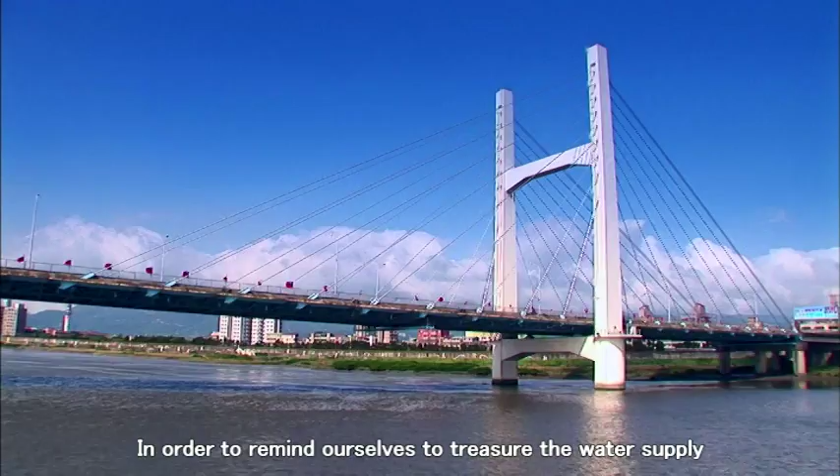Although Earth is mostly covered with water, the fresh water is less than 0.5%. The scarcity of water is resulted from the heavy environmental pollution and climate change. In order to remind ourselves to treasure the water supply, the United Nations has set the date of the 22nd of March to be World Water Day.

Although Taiwan is surrounded by oceans, the obtainable water for the people of Taiwan is only 1/6 of the average of the world and is ranked to be the 18th water shortage country globally.

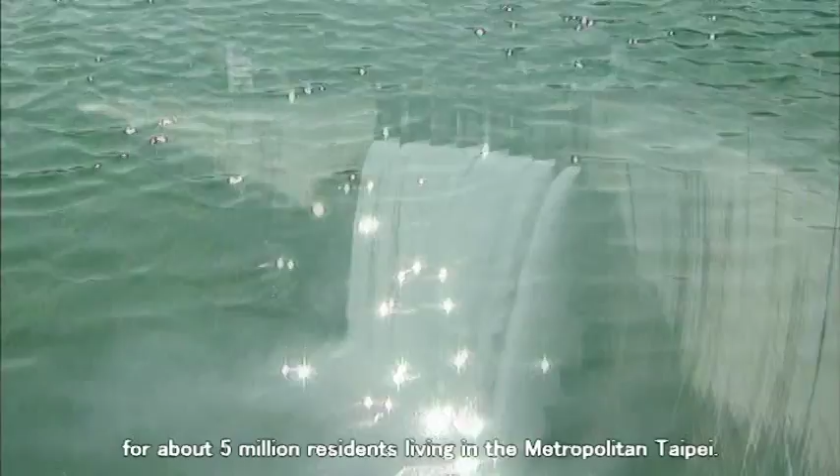The Taipei Feitsui Reservoir provides domestic water use for about 5 million residents living in metropolitan Taipei. Besides the domestic use of water, the reservoir also provides water for industrial use and firefighting to protect public safety and properties, and provides a strong support for economic development.

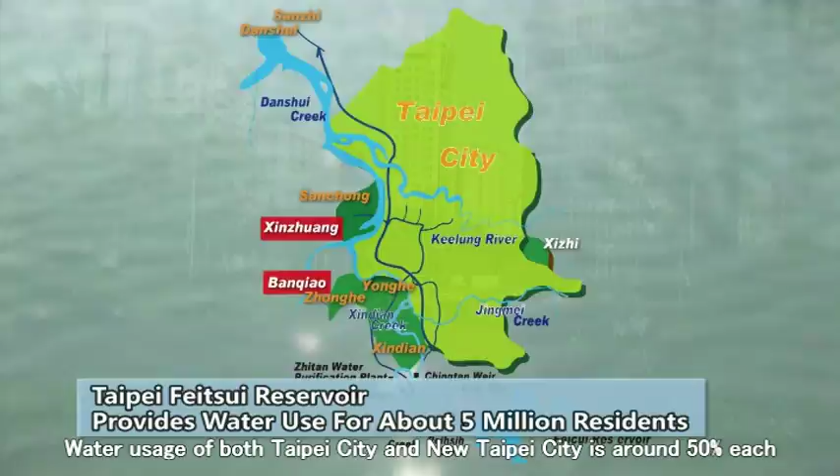Taipei Feitsui Reservoir Project provides water supply for the Taipei region, including Taipei City, as well as Xindian, Zhonghe, Yonghe, Sanchong, Danshui, and Sanzhi of New Taipei City. In recent years, Taipei Feitsui Reservoir also provides water supply for Banqiao, Xinzhuang, as well as others. Water usage of both Taipei City and New Taipei City is around 50% each, achieving the ideal goal of sharing the water of Feitsui Reservoir between two cities.

Rivers in Taiwan are short and oftentimes flow rapidly into oceans. It is difficult to have a stable water supply without reservoirs. As a consequence of increasing population and industry development in Taipei in the 1970s, water supply became insufficient, making a large reservoir necessary for metropolitan Taipei at that time.

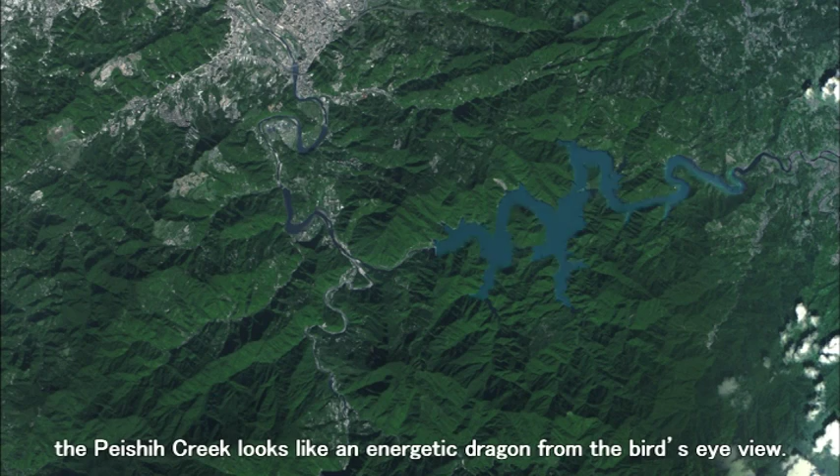Sourced from Mount Xueshan, Peishih Creek looks like an energetic dragon from the bird's eye view. The Feitsui Valley, located downstream of Peishih Creek, shows a rather gentle slope, and its bedrock is really hard and dense. After careful investigation, it is regarded as the optimum site for an arch dam. Accordingly, the reservoir was named as Taipei Feitsui Reservoir.

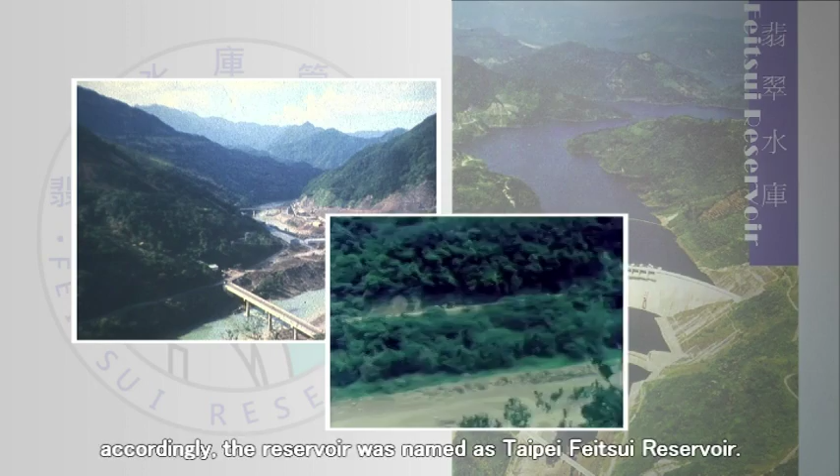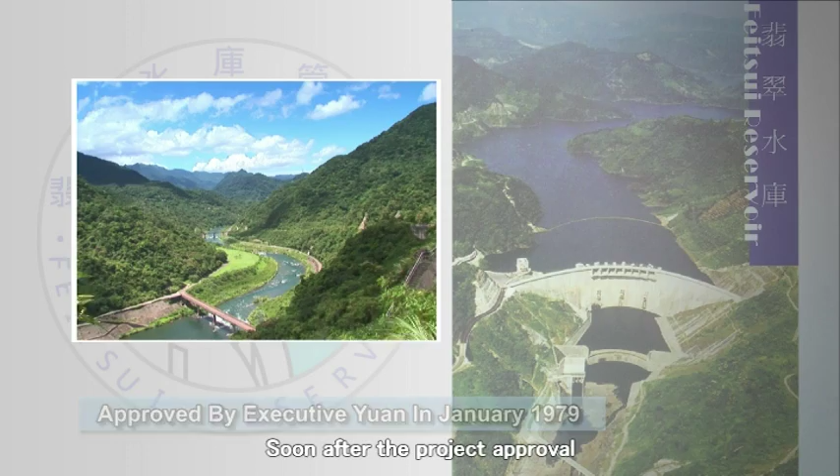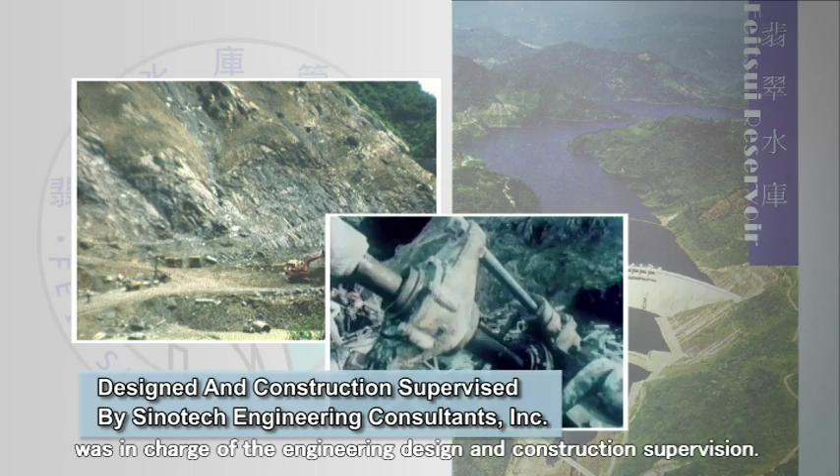Taipei Feitsui Reservoir Project was approved by the Executive Yuan in 1979. Soon after the project approval, Taipei Feitsui Reservoir Committee was set up to oversee the project. Taiwan Power Company was assigned to manage the project, and Sinotech Engineering Consultants Incorporated was in charge of the engineering design and construction supervision. The main contractor was Retired Servicemen Engineering Agency.

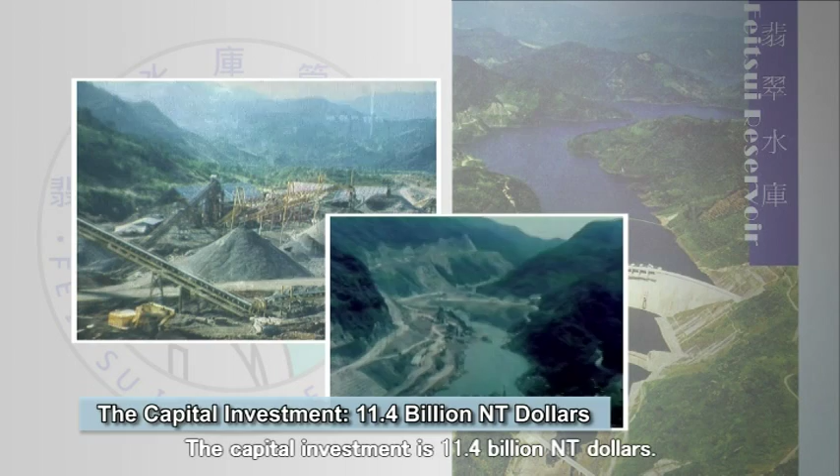The capital investment is 11.4 billion NT dollars. It is the first large arch dam planned, designed, and constructed by locals. The group of the project had behaved efficiently and cautiously. They worked very hard to ensure the project is always on schedule. The contractor made strenuous efforts to meet the target date for completion within 8 years.

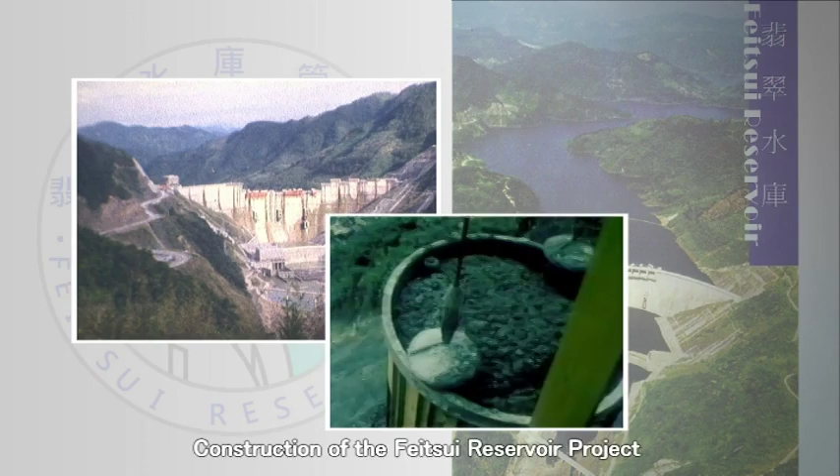Construction of the Feitsui Reservoir project was completed on schedule in June 1987. Then the newly set up Taipei Feitsui Reservoir Administration took over the responsibilities for management.

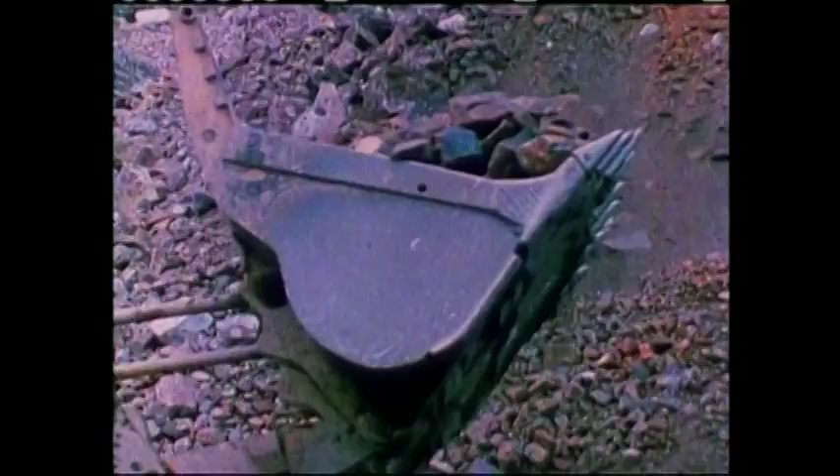Upstream cofferdam and diversion tunnel were completed first during the initial stage of construction. They diverted the water from the creek into the diversion tunnel and dried the riverbed of the dam site. Thus, engineers could excavate the bedrock in the creek to construct the foundation of the dam.

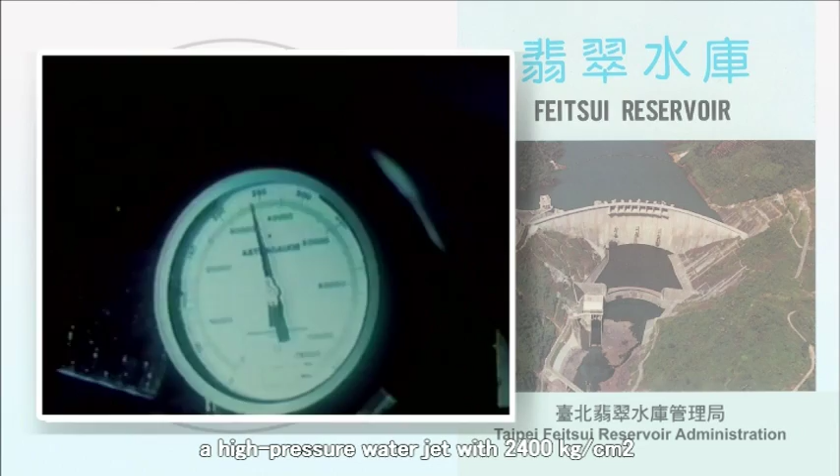During the construction of the dam, due to existence of some clay-filled seams in the bedrock, a high-pressure water jet with 2,400 kilograms per square centimeter was used to clean seams and refill them with non-shrinking cement mortar to enforce the solidity of dam foundation and ensure the dam safety.

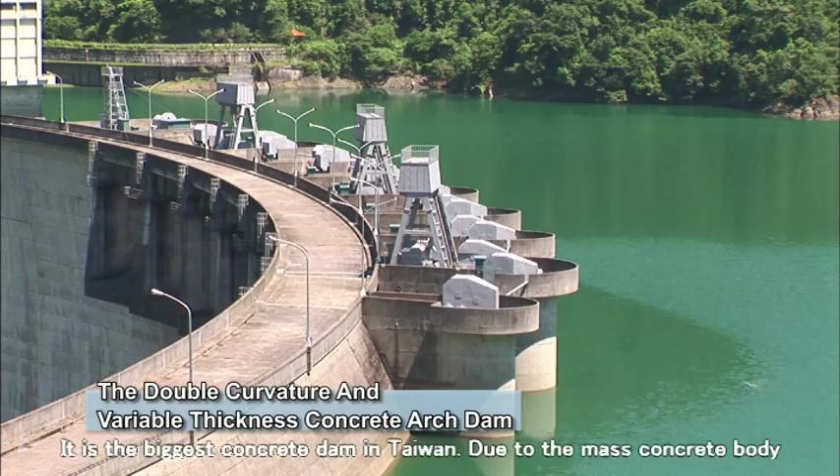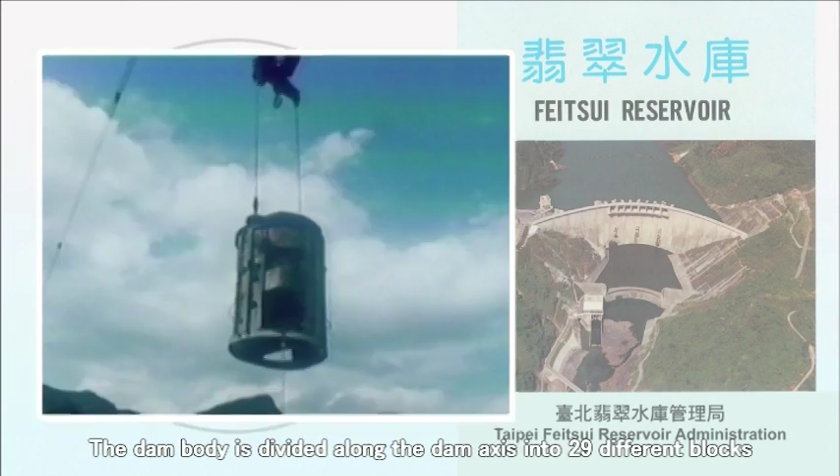The Feitsui Dam is a three-centered double curvature with variable thickness arch dam, the biggest concrete dam in Taiwan. Due to the mass concrete body, temperature control is important when concreting the dam. Pre-cooling and pipe cooling methods were applied. The dam body is divided along the dam axis into 29 different blocks with a total of 938 lifts. Each of the lifts is 2.5 meters high.

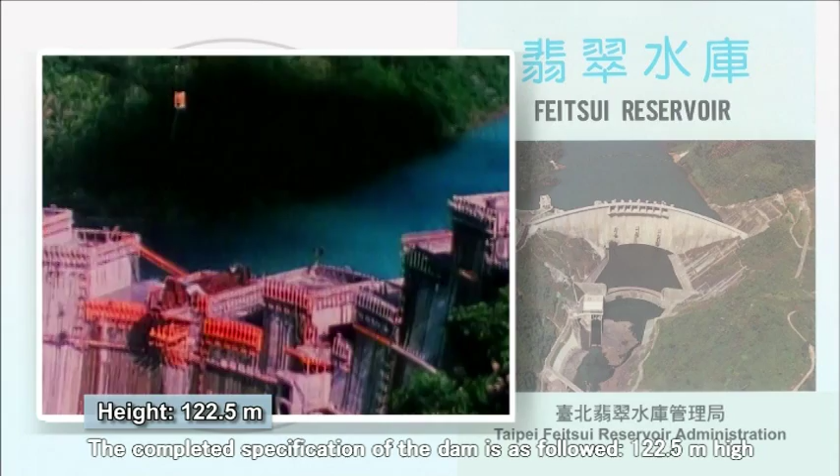The main function of the dam is to intercept and store water flowing from Beishi Creek. The completed specification of the dam is as follows: 122.5 meters high, about 45 stories tall, and 510 meters long at the crest, with 700,000 cubic meters of concrete in volume.

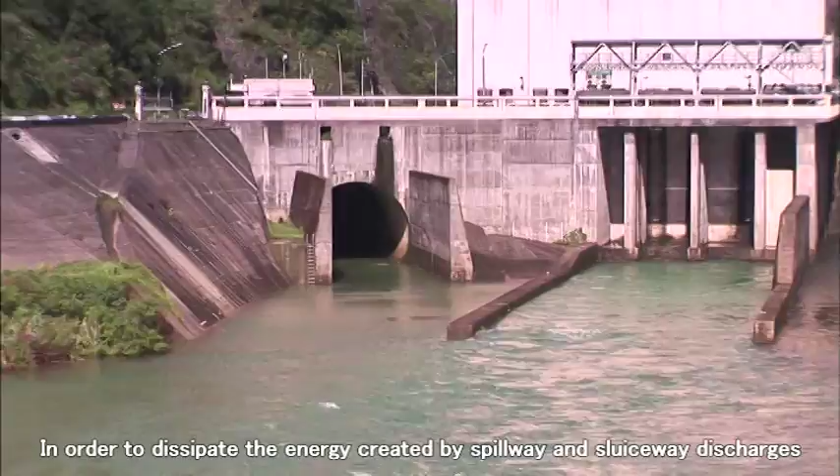The spilling facilities consist of 8 crest spillways, 3 sluiceways, and 1 tunnel spillway. The design flood discharge is 9,870 cubic meters per second. In order to dissipate the energy created by spillway and sluiceway discharges, a plunge pool of depth 33 meters is provided immediately downstream of the main dam.

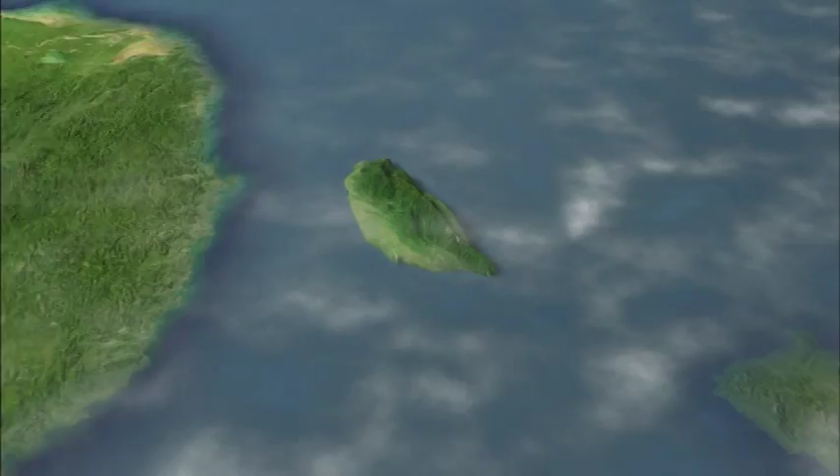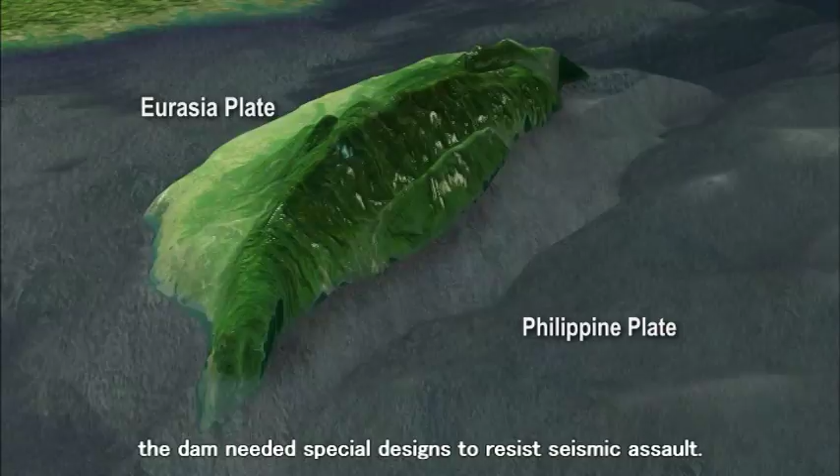Since Taiwan is located within the collision zone of the Eurasian Plate and the Philippine Sea Plate, the seismicity along the Taiwan area is very high. Therefore, the dam needed special designs to resist seismic assault. The seismic design of the Feitsui Dam is the same as a nuclear power plant. The design horizontal peak ground acceleration is 0.4 g.

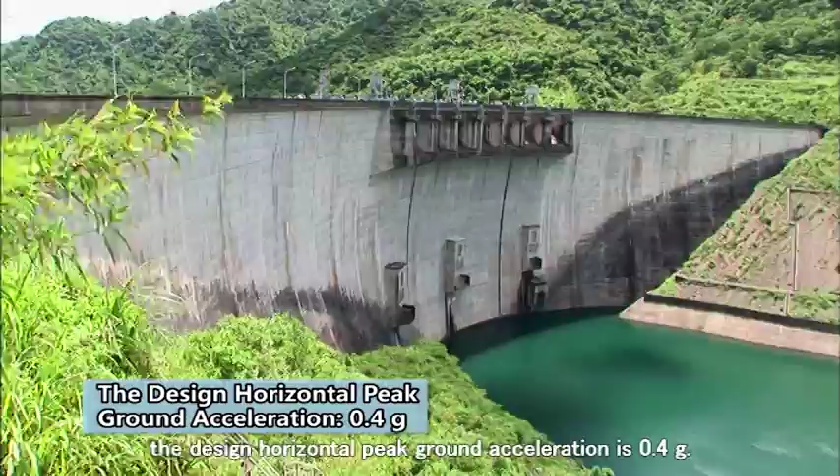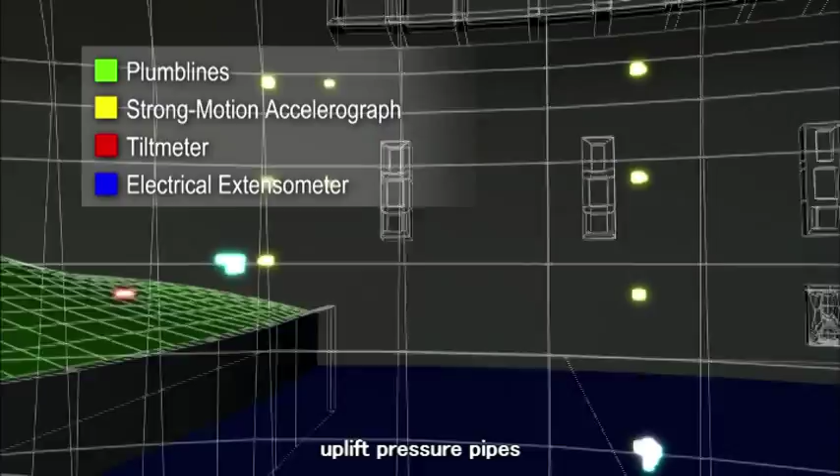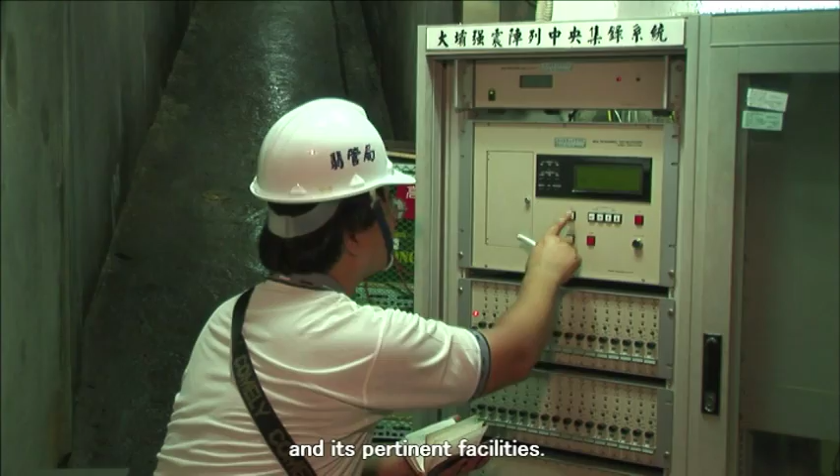The dam and its pertinent facilities are equipped with 17 kinds of instruments, including plumb lines, strain meters, stress meters, uplift pressure pipes, weir stations, strong motion accelerographs, and so on. These instruments monitor the structural behavior of the dam and its pertinent facilities. They also may help detect and analyze potential problems that might occur. For data analysis, a real-time dam safety evaluation system is developed to check the dam behavior.

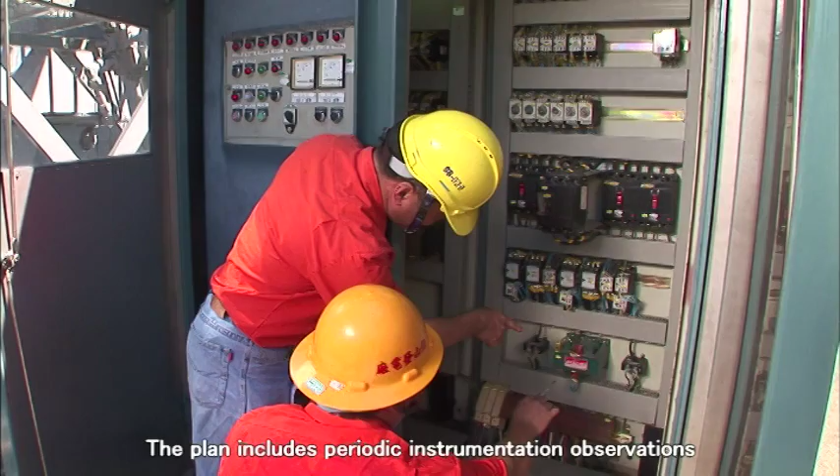In order to ensure the dam safety, we have developed a systematic maintenance plan. The plan includes periodic instrumentation observations, on-site inspections, timely evaluations, maintenance, and special tasks for earthquakes and typhoons.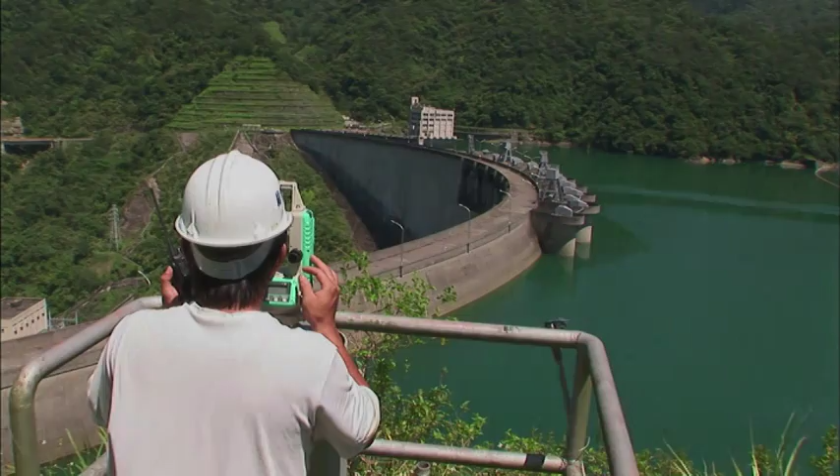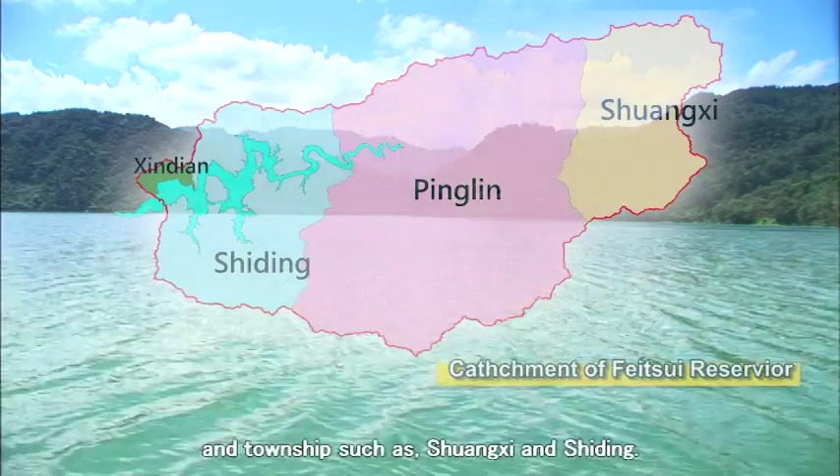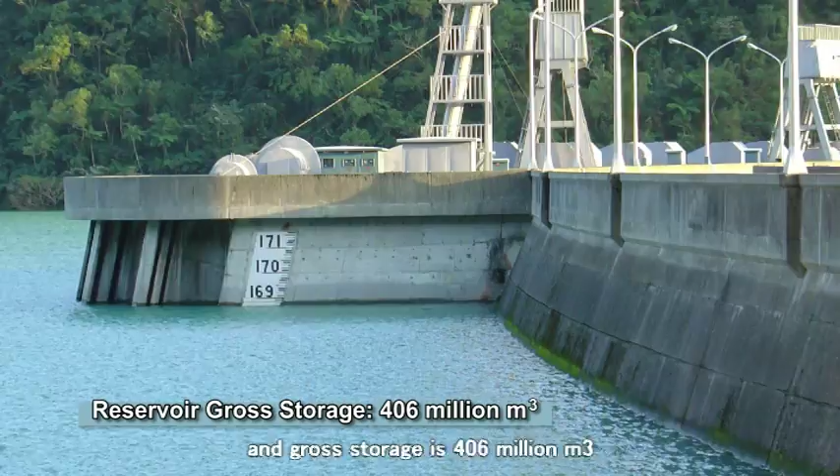The watershed area is about 303 square kilometers. It covers part of New Taipei City, including Pinglin and Xindian, and townships such as Shuangxi and Shiding. The full pool area is about 10.24 square kilometers, and the gross storage capacity is 406 million cubic meters. The full pool level is 170 meters above sea level.

Taipei Feitsui Reservoir is the second largest reservoir next to Zengwen Reservoir in Taiwan. The goal of the Taipei Feitsui Reservoir project is to provide public water use only. The raw water operation policy is utilizing Nanshi Creek natural flow first. If it does not meet the demand, then water is released from the reservoir to satisfy the demand.

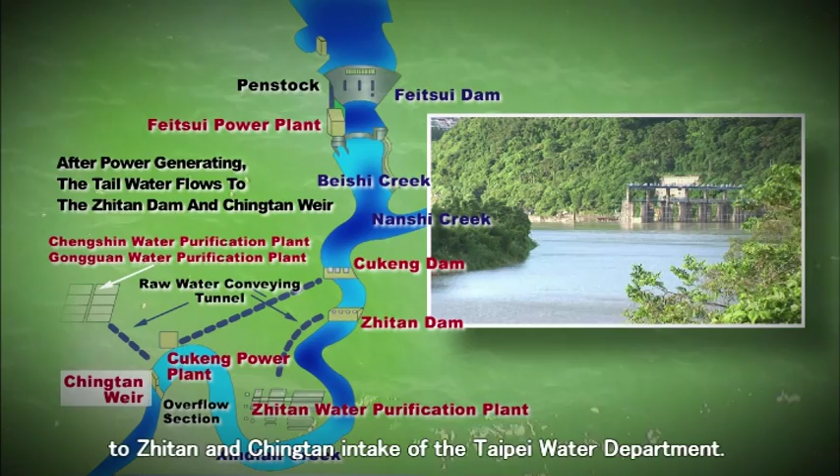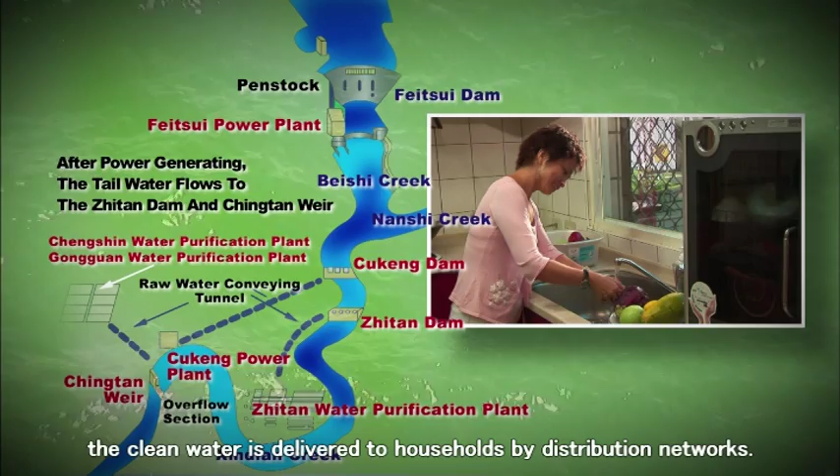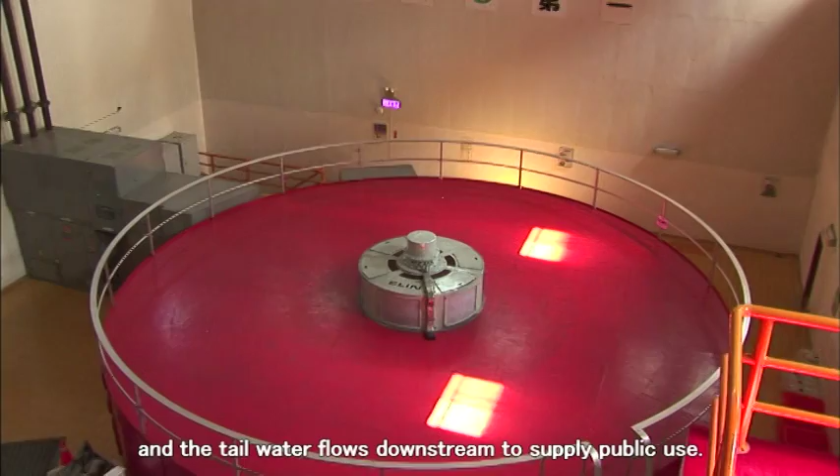Both discharges from the reservoir and Nanshi Creek are conveyed through the river channel to the Zhitan and Chingtan intakes of the Taipei Water Department. After purification at the water treatment plant, the clean water is delivered to households by distribution networks. For efficient water resources utilization, a 70,000 kilowatt hydraulic power plant was installed to generate green electric power, and the tailwater flows downstream to supply public use.

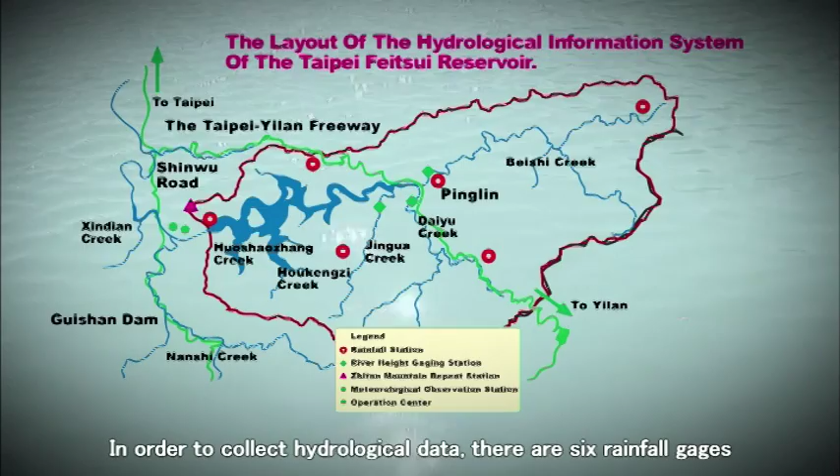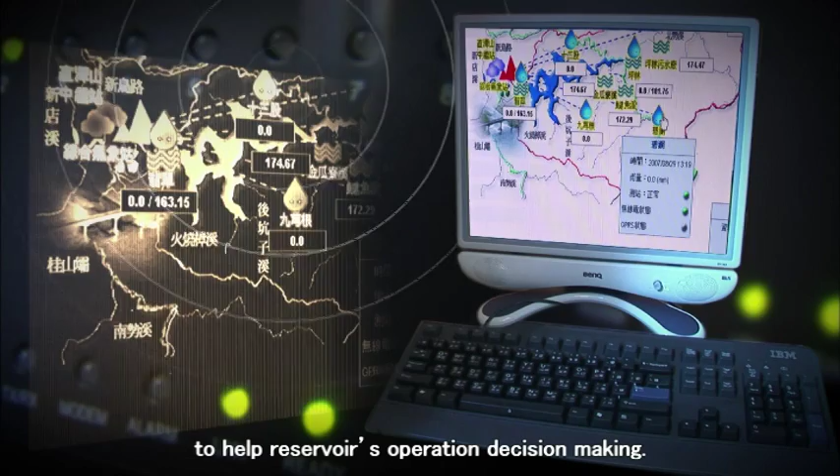In order to collect hydrological data, there are 6 rainfall gauges, 3 discharge stations, and 1 meteorology observation station deployed in the watershed. The real-time data, transmitted wirelessly to the Reservoir Operations Center, are analyzed by a computerized operation system to help reservoir operation decision-making.

When a typhoon attacks, the administration cooperates with the Central Weather Bureau, the Danshui River Basin Flood Control Command Center, and so on. Taipei Feitsui Reservoir Administration also works with the Shihmen Reservoir to release floods strictly following operation rules to ensure dam safety, water supply, and flood mitigation.

The administration releases flood warnings to the media and informs the Disaster Prevention and Rescue Centers of both Taipei City and New Taipei City before flood releasing. The Bureau also uses a flood warning system to notify citizens to prepare themselves for the flood.

To secure the safety of water use for 5 million residents in metropolitan Taipei, the reservoir has been set as a restricted area. Any recreational activity, such as fishing or boating, is not allowed in this area. In order to watch the condition of land use, we inspect the catchment area frequently so that irregularities discovered may be immediately reported to the authorities for corrective action without delay.

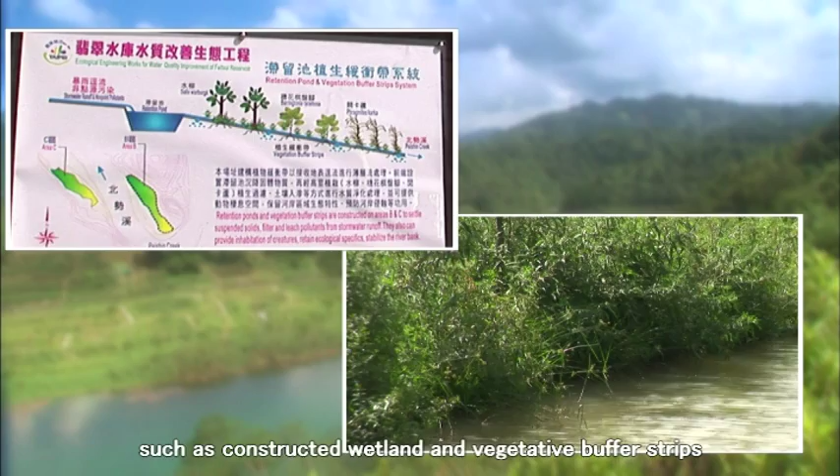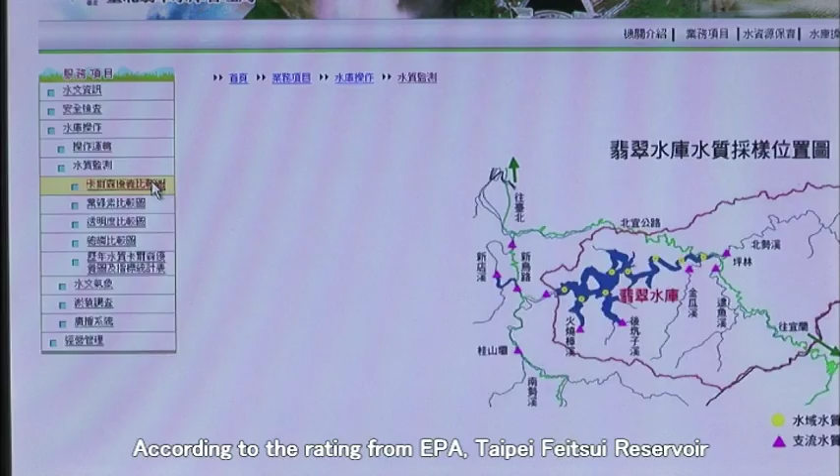In recent years, we applied ecological engineering methods, such as constructed wetlands and vegetative buffer strips around the reservoir, to effectively eliminate pollutants, nitrogen and phosphorus, contained in the water. To monitor the water quality in the reservoir, we schedule several related research projects involving algae, aquatic plants and animals, and physical and chemical analysis of the water. According to the rating from the EPA, Taipei Feitsui Reservoir is one of the best reservoirs in Taiwan in water quality.

To prolong the useful life of the reservoir, one of our strategies is to continue working on water conservation, landslide hazard mitigation, and reforestation so as to lower the sediment. During the flood or typhoon season, our strategy is to keep the clear water and discharge the turbid water to remove the sediment. The sedimentation survey is conducted every year to serve as the basis for estimation of the effective capacity.

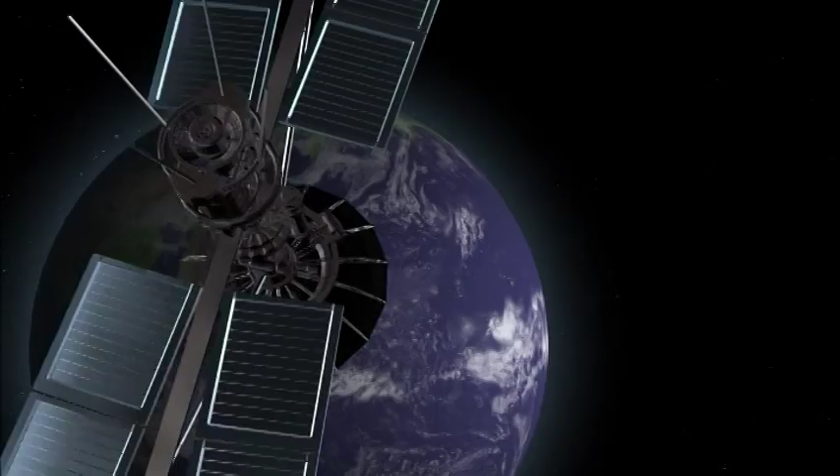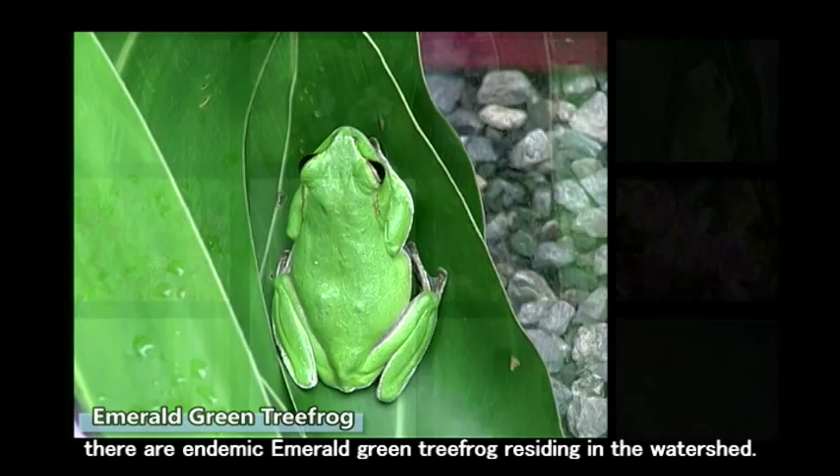A healthy watershed comes from a healthy ecological environment. For years, the watershed of Taipei Feitsui Reservoir still preserves a pristine and diverse ecological environment with the protection of related agencies and residents. Besides the common species in Taiwan, the endemic emerald green tree frog resides in the watershed. Moreover, the special and gorgeous flower, Rhododendron kanehirai Wilson, was also successfully restored in the Feitsui area.

In January 2004, the first Water Resources Eco-Education Center in northern Taiwan was completed. With the completion of the center, the reservoir has greatly enhanced environmental education advocacy by replanning and redesigning the Water Resources Eco-Education Display Area in 2009. The center now integrates information systems of reservoir safety, operations, and water quality. Providing clear information to the public, it functions well both in education and in promotional activities.

The reservoir actively invites scholars from home and abroad to give lectures through hosting conferences related to water resources. We hope to continue to deepen and widen the academic discussions of water resource conservation.

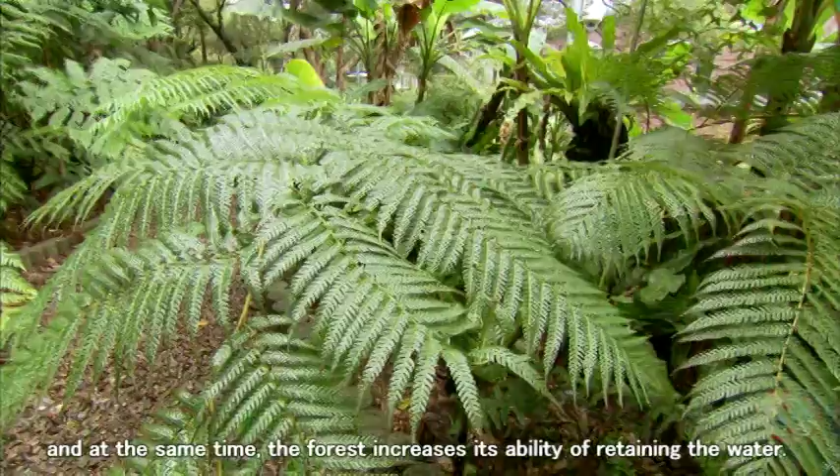In 2007, Feitsui Reservoir Administration launched the first fern garden in Taiwan with the help of an environmental greening foundation. The garden exhibits fern evolution and the riotous profusion of ferns in Taiwan. Most ferns grow at the bottom of the forest and have the function of preventing soil erosion. At the same time, the forest increases its ability to retain water. Through the fern garden, visitors will experience the close relationship between ecological conservation and water conservation.

After the completion of Taipei Feitsui Reservoir, residents of metropolitan Taipei have been far away from nightmares of summer droughts. However, a serious drought in 2002 caused water rationing in Taiwan. The reservoir managed the drought cautiously, and through the cooperation of related authorities and the public in water saving, fortunately, we overcame this crisis. This experience reminds us that water is not an inexhaustible supply and is not always plentiful.

We should keep the past suffering of water shortages in mind at all times. Therefore, to cherish water resources, everyone should form a habit of water saving and not pollute the natural environment arbitrarily. Then we can expect the possibility of human existence in the future.

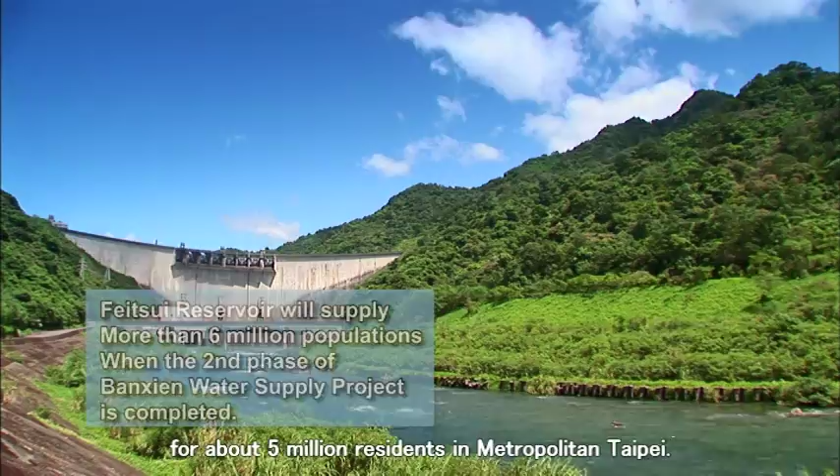Water, essential for life, nourishes all living things on Earth. Taipei Feitsui Reservoir is the most important water source for about 5 million residents in metropolitan Taipei. Let's go hand in hand to protect it and leave our future generations a clean, beautiful water source.